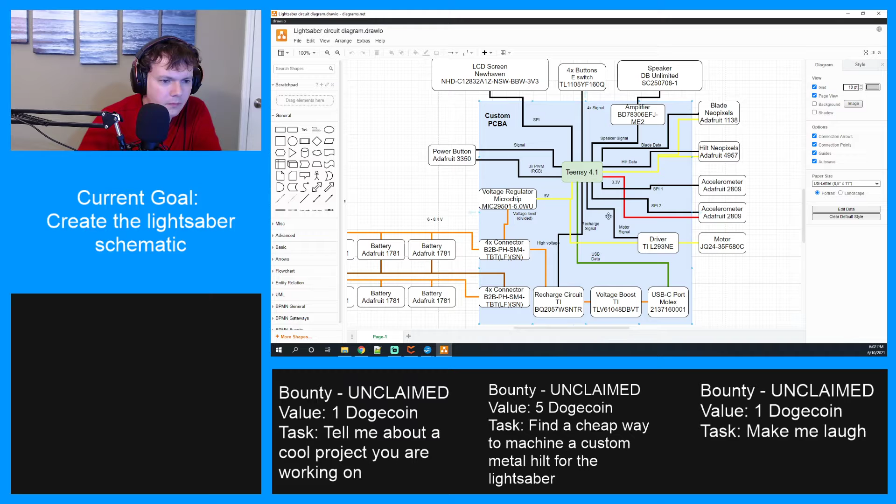This should be good. Let's see, what else? Yeah, so that'll be a good start. So I'm going to try and separate this out and organize it. So I'm going to have different sheets of the schematic, like different pages for the schematic. And the first page will be this power supply.

Then maybe the next page will be like the buttons. And let's see, we would probably want to do user interactive stuff. So buttons, screen, speaker, anything that gives data back or receives data from the user. And then maybe like the Teensy itself is a thing. And then all the NeoPixels is a thing. And then accelerometer and motor is a thing.

We'll see. We'll separate things out too if they start to get really complicated. We'll make multiple pages for it. So I'm just going to follow this.

So far what we've really done to decide this is make this block diagram and pick out components that we want to use for these different blocks. So now we have to go through and actually create each block and all of its intricate little parts.

As a standard rule, we're going to be using for capacitors and resistors and things like that, what's known as 0805 components. It's just a size that will be fairly easy to work with using a standard soldering iron and not have to use an oven or a microscope or anything. And then everything else, yeah, we'll just use it.

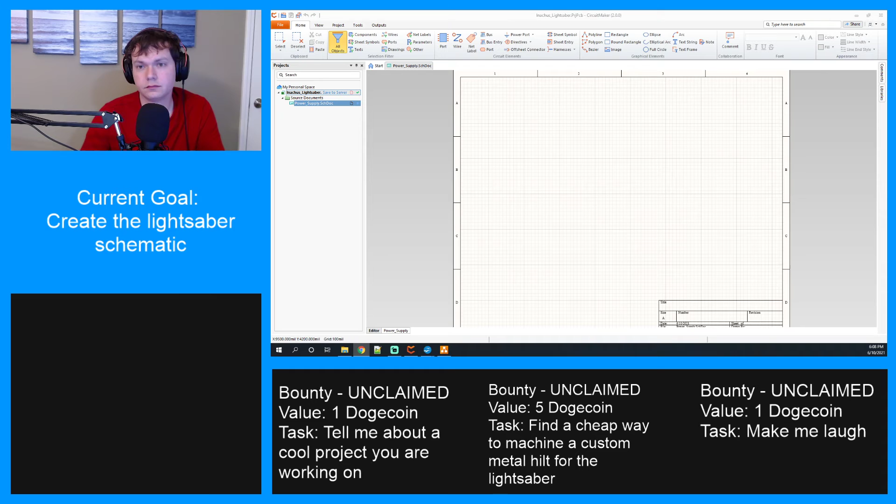All right. Part. All parts. Search. I wonder what the chances are that this has already been made. I'm just going to search, just curious.

It's not looking good, lots of toggle switches. 61048. Ah, nothing. All right, we're going to make a custom part.

All right, well. What is the one we picked out? Oh, 48. What is the DBVT? I need to double check.

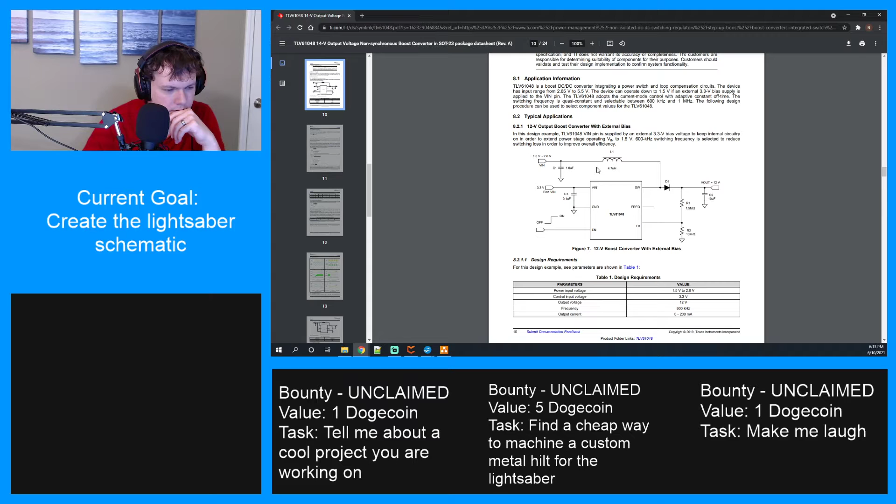What are these two things? With external bias.

Hold on, thought I saw more basic. Right, this one, okay, this is the one we probably want. All right, so double checking that. I was worried that, because I saw the 12 volt and 14 volt thing, that it mattered. Adjustable, we call this.

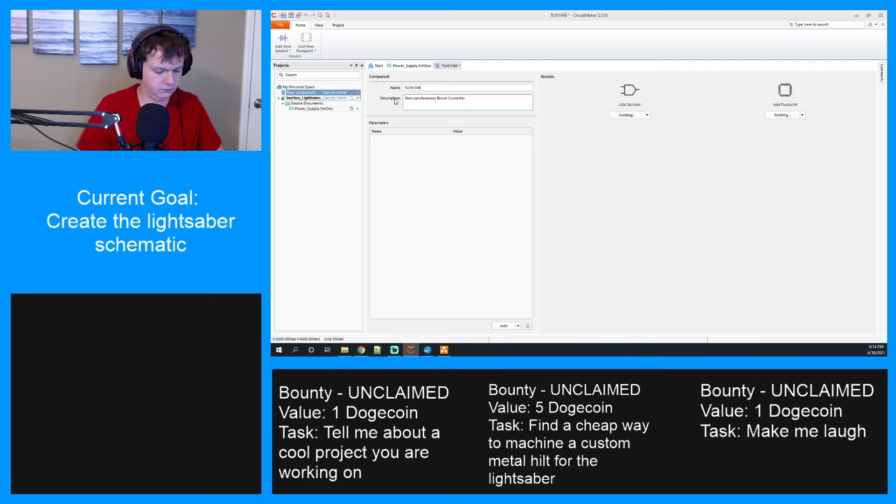How about a non-synchronous boost converter? I'm just using the words that they use here. Okay.

So another thing too, CircuitMaker did a major update between the last project and this one, and it's completely different, right? So this is gonna take some work.

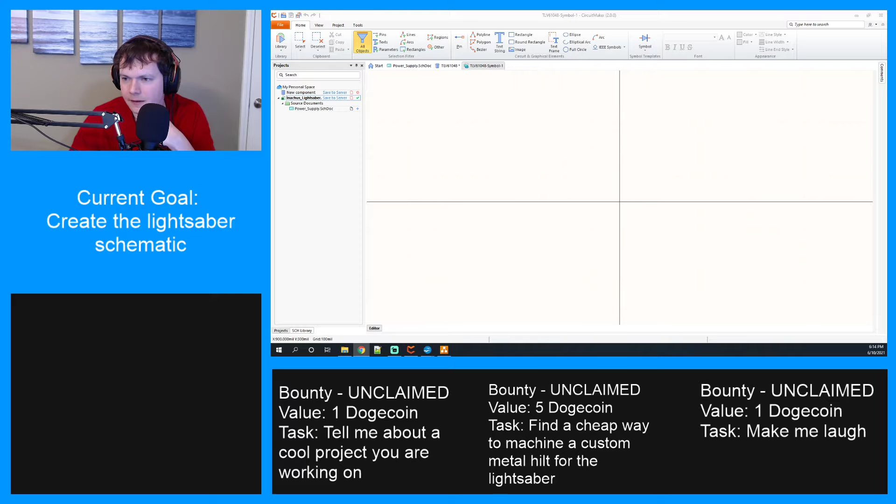All right, new symbol, and we're drawing a symbol. So this is just, we'll use the one given right here. We'll basically make this, but add pin numbers as well. Okay.

So, I guess we start with a rectangle. Okay, clearly I don't understand how this rectangle drawing tool works. Back up, really? Okay, thank you. Here we go.

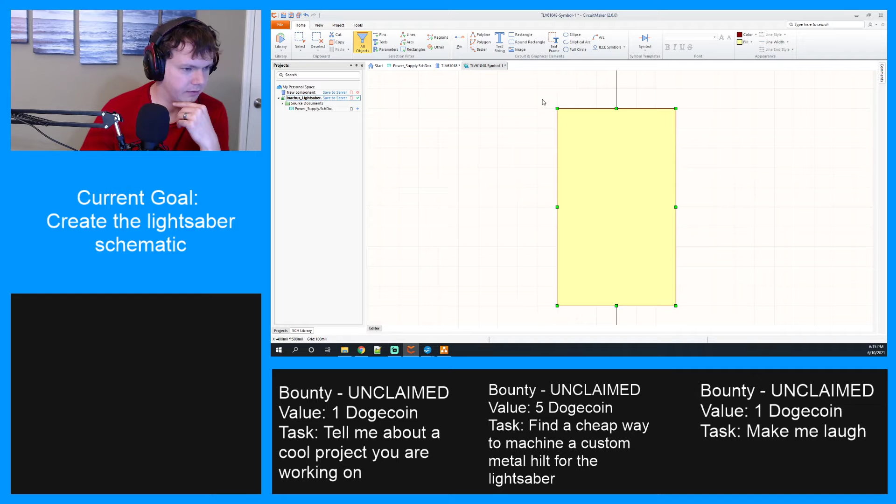And then I'll probably make this a little bigger. I'm not a good judge of how big this is going to be on the schematic too. 200 mil, 300 mil. So up 500 mil, down 500 mil. So on the page, it's about an inch tall. That's probably fine, that'd be sizable.

Does it connect on that side or this side? I think this way? I don't know why it's starting at there. Oops. How do I rotate it? Nope.

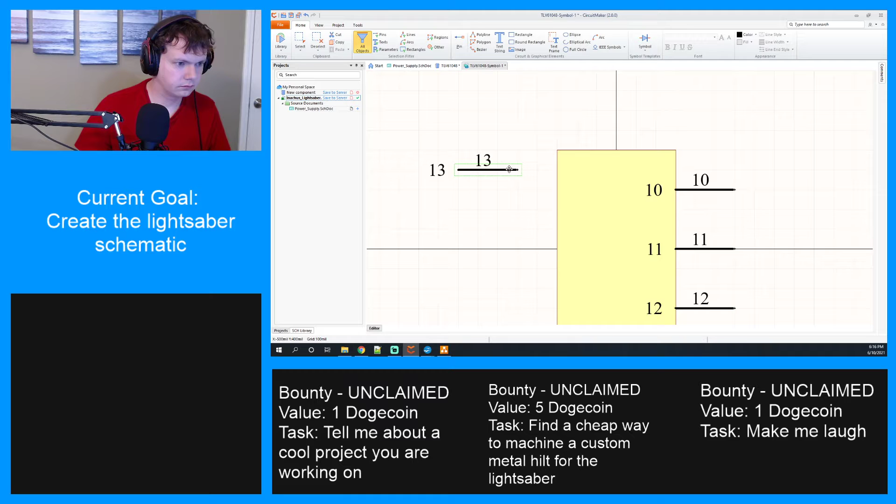Okay. And then, whoops. One and one.

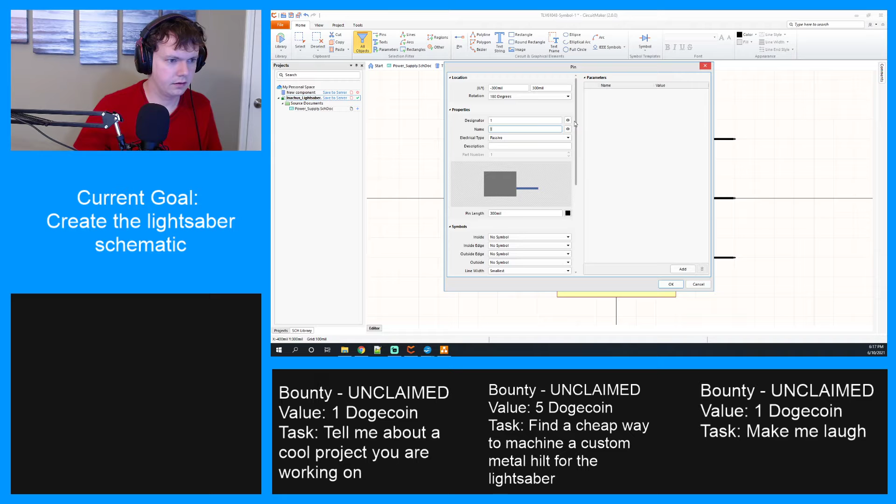Oh, the designator needs to be... Right, which one is this? So the designator is the one there. Okay, the name is the one that needs to change. So that's VIN.

This is ground. And this is enable, active high.

I wonder if that's supposed to have a pull down on it. It doesn't show it here, but we might do that.

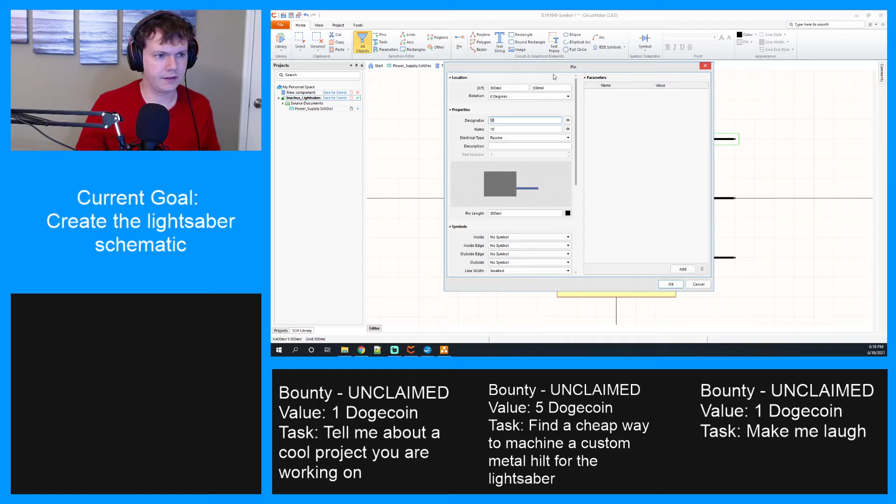All right, which one is this? Oh, pin 6, which I think is SW. Oh, what? The...

All right, the schematic is completely different from the actual package, so we're gonna have to go through and renumber these pins, but we can do that. SW.

I want to have them in the same way that they are in the schematic here, because I think that is probably done very specifically to help make it easier to draw on the schematic. See, okay.

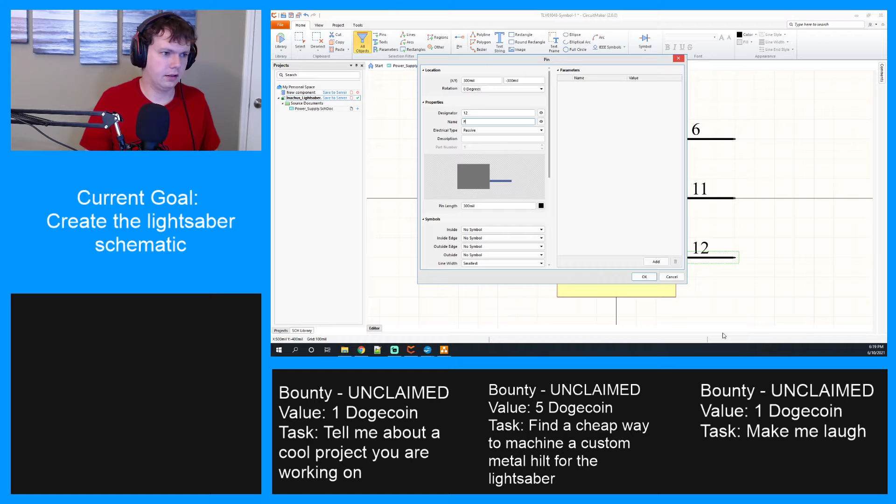And then FB. All right, and then we're gonna have to renumber these. Give me just a sec.

So SW is 1. Ground is 2, so that's right. FB is 3. This is gonna be so confusing.

EN is 4, enable is 4. Five is VIN. And I guess that leaves frequency for 6.

Okay. Do we need like a name or something? I don't know how to do that. We'll save this for now. We might have to come in and change it later.

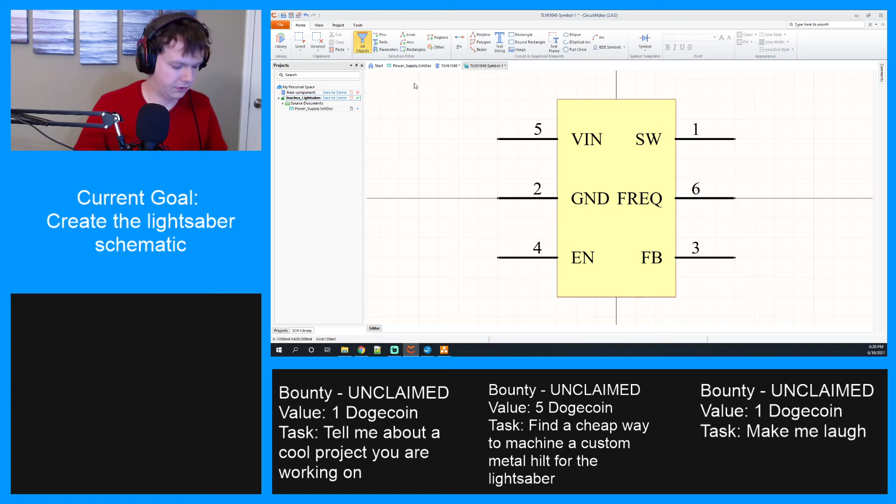All right, and then we need a footprint. This is going to be the trickier of the two.

Ooh, excuse me. Okay.

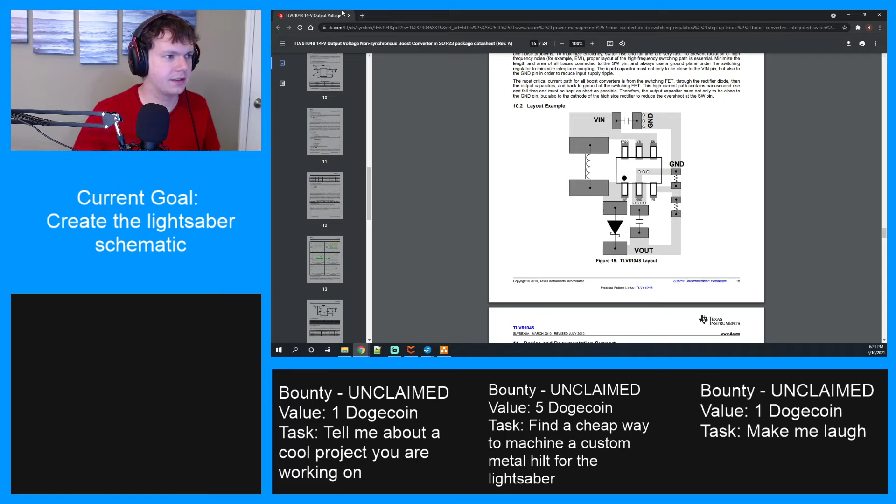We probably just want to do the pads. It gives us a recommended circuit here, but there's really no point in doing any of this extra stuff. We'll do all that later with the extra components. So we'll just start with placing these specific pads for it to mount to. In the datasheet, you can see there's a footprint provided, which tells you exactly how to do the whole layout.

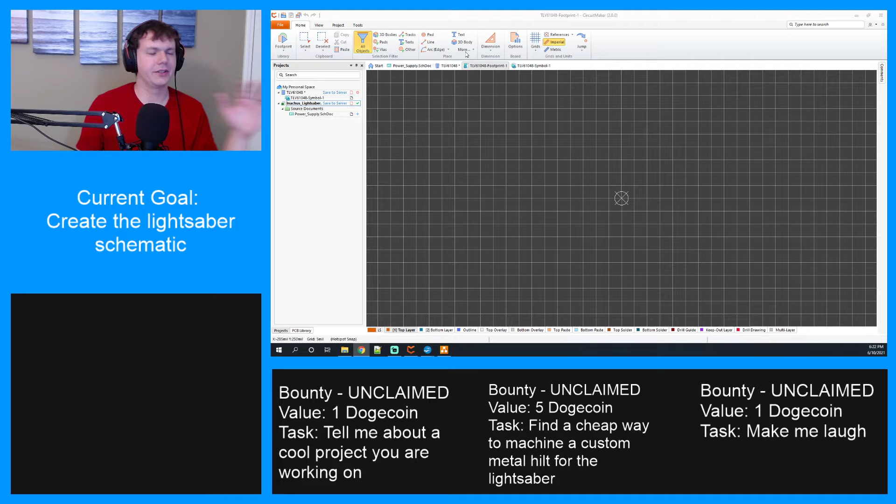Oh, this one, that's what I want. And I really don't want that. Does this have to be a via? Multi-layer. Solder? Interesting.

I just need to see everything that's going on here, and then I'll work it out.

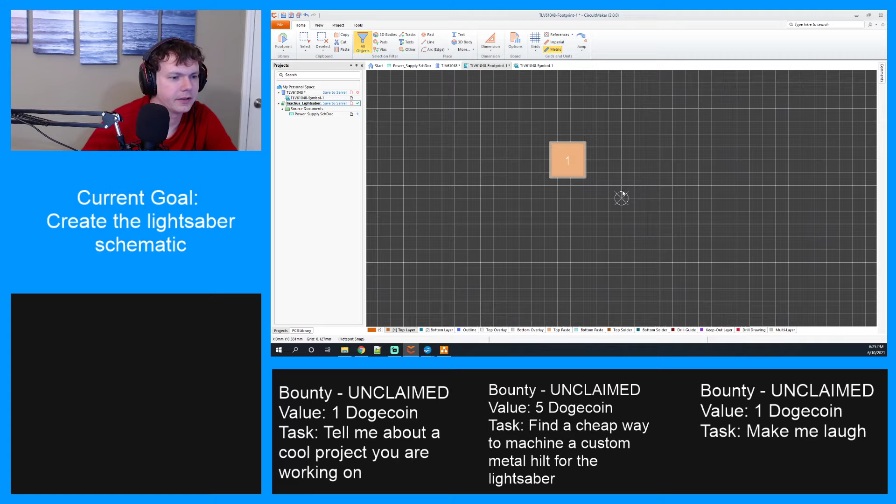All right, let's see if we can change this. Board, inspector, library, shortcuts. Oh, here it is, let's go metric. There we go. Okay.

So it is 1.1 millimeters wide and 0.6 millimeters tall. This is still going to be hard to work with. Okay, and then all this stuff is done as an offset from the center in this datasheet, which is awesome because it actually makes it easy to do. Sort of. So this should be negative 1.3, and then it should go up 0.95. So we're pretty close already.

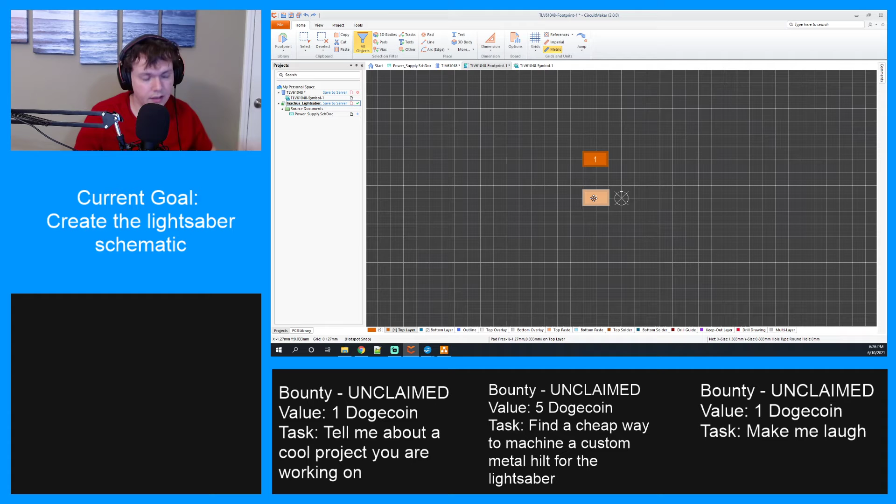Okay, so that's the first one. Then we need multiple. Oh, there it is. Let's make sure we don't have that. All right. Okay, so the Y should be 0, and this should be negative 1.3 again. There it is, okay.

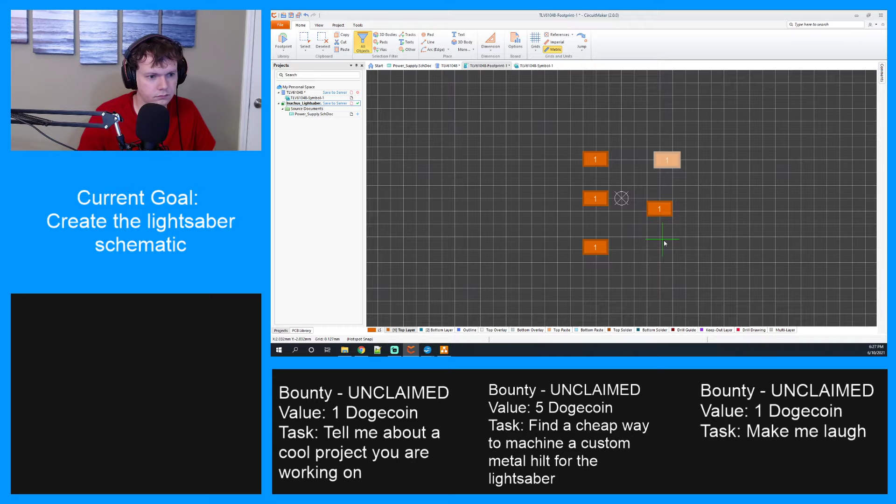Ah, slowly learning this software. It's neat software, it just requires a lot of work. All right.

So negative 1.3 millimeters and then negative 0.95. I just realized that I made this one too high—this should be positive 0.95. There we go. All right. 1.3, 0.95.

Zero. All right, as I get the hang of this again, I'll go faster. 0.3, or negative—positive 1.3 and negative 0.95. All right, so that's everything together there.

Now we need to rename—designator 2, three, 4, 5, 6. Okay.

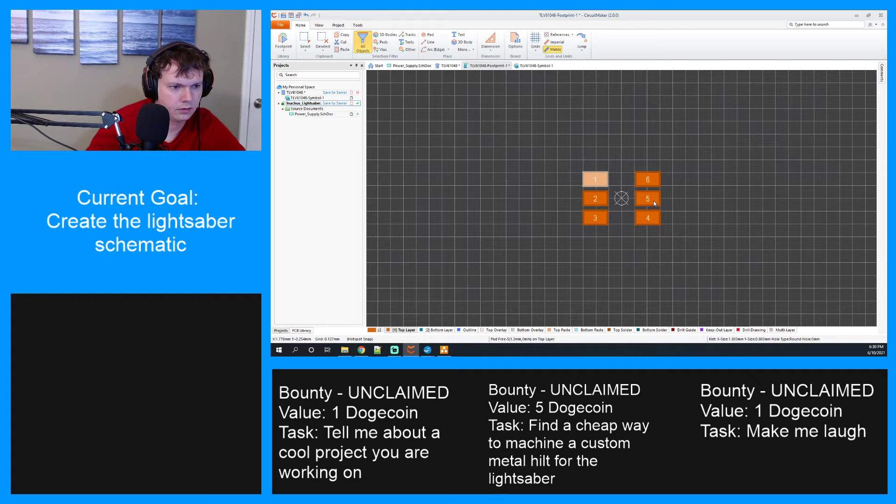Mask opening, exposed metal, yada yada yada. All right, let's see if it has exactly that. Paste mask expansion, solder mask expansion, manual. So it looks like 0.05 is the distance around. Let's see if this works. Okay, oh it does—okay, so I am theoretically doing this correctly.

So that's the distance between the stop, like the top layer where they want it to stop, and then where the metal starts. I don't think it really matters that much, but since they bothered to specify it, I am going to specify it as well.

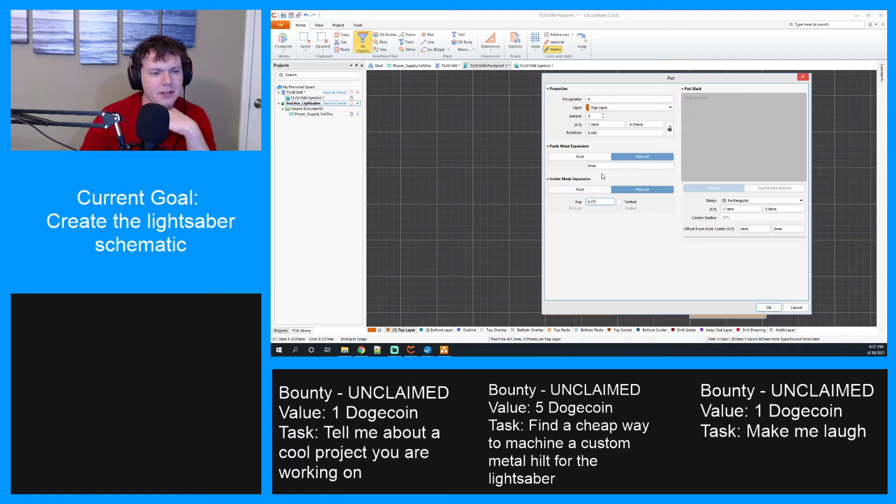Interesting stuff, it's very interesting to me—I'm going to try that again. It's very interesting to me to see what kind of stuff people bother to outline in their datasheets. This is a TI part—TI is huge, Texas Instruments. They make all kinds of chips, based here in the US, and they've been around so long that they have many standards for how their products are set up and what they define. Their datasheets reflect that; there's a lot defined. In a lot of products like this, you'd see the pad size and spacing of pads defined, but they wouldn't necessarily say how much space there should be between where the metal is and the covering stop layer.

The fact that they bother to spec all of this out is incredible. Molex is the same way - another great example. Molex makes connectors, and they define everything. But if you go to a smaller or less known company, there may be a lot of things left out of their drawings, or about their reliability specs. So you can tell how rigid a company is by the effort they put into something, and maybe even their customers, because people that buy TI parts and spend the extra money care about all of these things being defined.

Now let's draw the part, like where it's going to be, so we can have a drawing on the board for keep out purposes. So the part's actual casing is 1.75 millimeters wide at its max, its smallest is 1.45 - they spec out the tolerance because that can vary. And then 3.05 tall.

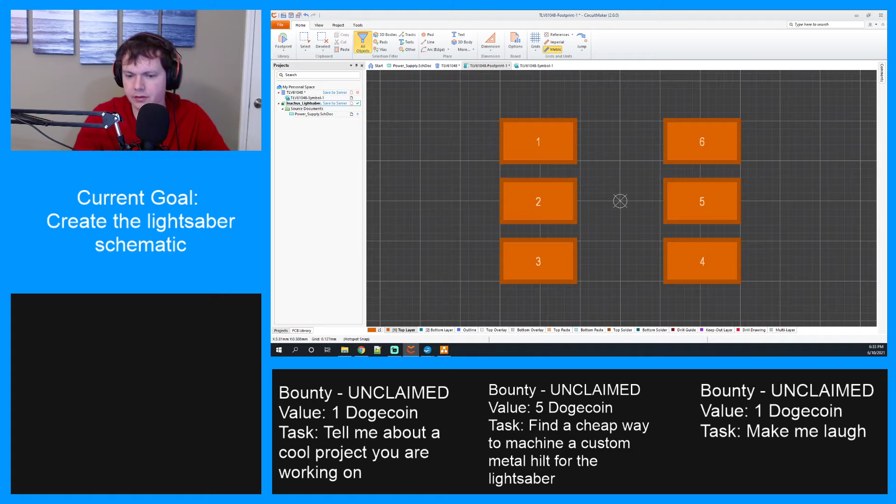So let me get a calculator. Now we get to do all the fun math. Let's just draw a couple lines and then position them accordingly. Ah yes, these are in the copper layer - probably not what you want. We'll just move this to the top overlay. Notice too how there's given top and bottom options here. You can create parts that have definitions on multiple layers, so that's kind of cool.

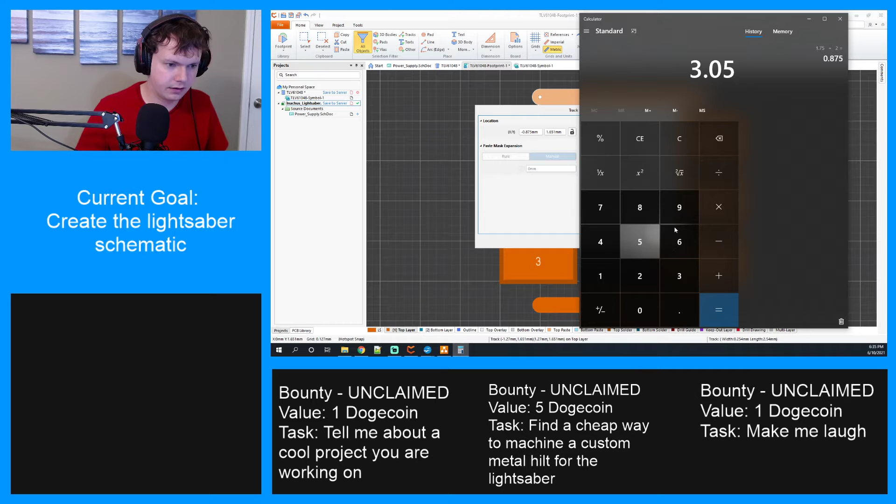So yeah, okay, we want the top overlay. And then our start is going to be - what's 1.75 divided by 2, 0.875. That's negative 0.875 and positive 0.875. And then our maximum height is 3.05, so that's divided by 2, 1.525. Okay, so that's where we want it.

Same thing here. Top overlay. And then this will be the negative 1.525. And then we said 875.

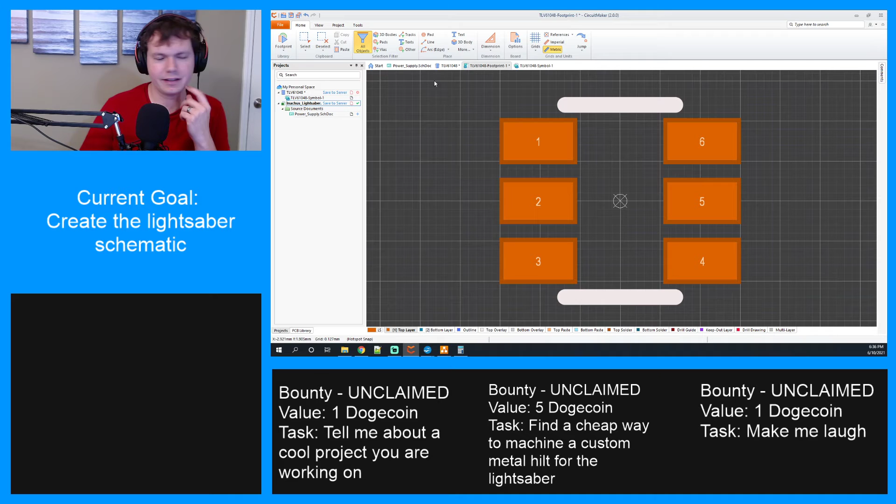Excellent, okay, so that definitely looks much better. Then we'll want like a dot or something here to denote that this is pin 1. Another way we can do this is put a line on this side - actually that's what I'm going to do. I kind of like that better because it'll be hidden underneath the chip.

So we'll put a line here to here. Oops. All right. And we will say that this is the top overlay, and then where it's at might be okay. Actually, we'll adjust the height a little bit. Yep, dead even, all right. I didn't even bother to look at the thickness to see if that was anything I cared about.

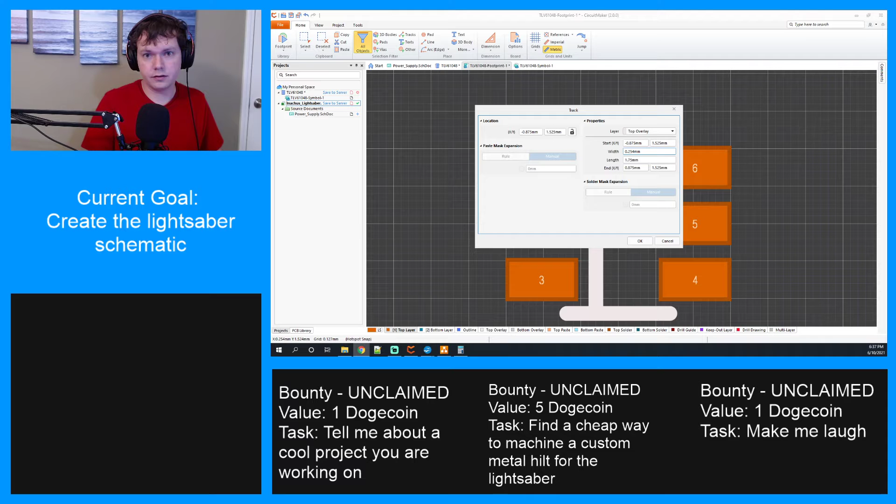All right, what are the other options here? Fill, solid, via, keep out. Interesting, text, big text. I don't know why it defaults all this stuff to the... oh, because I'm selected that layer, so...

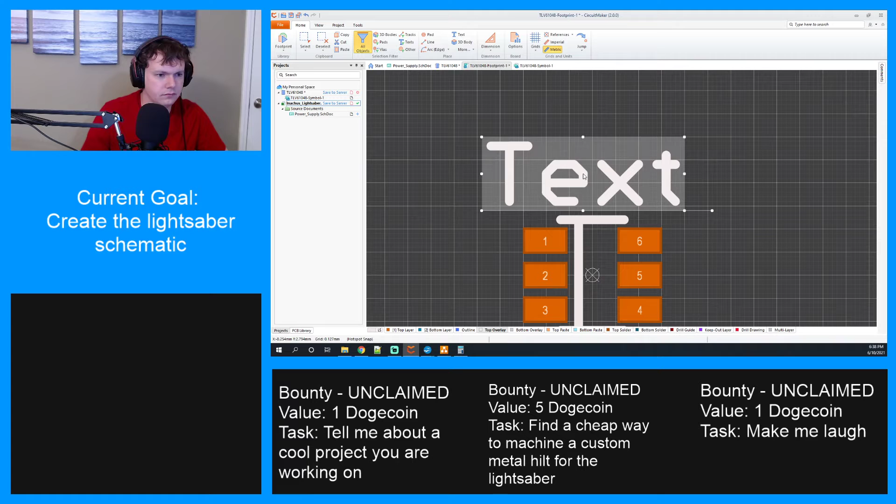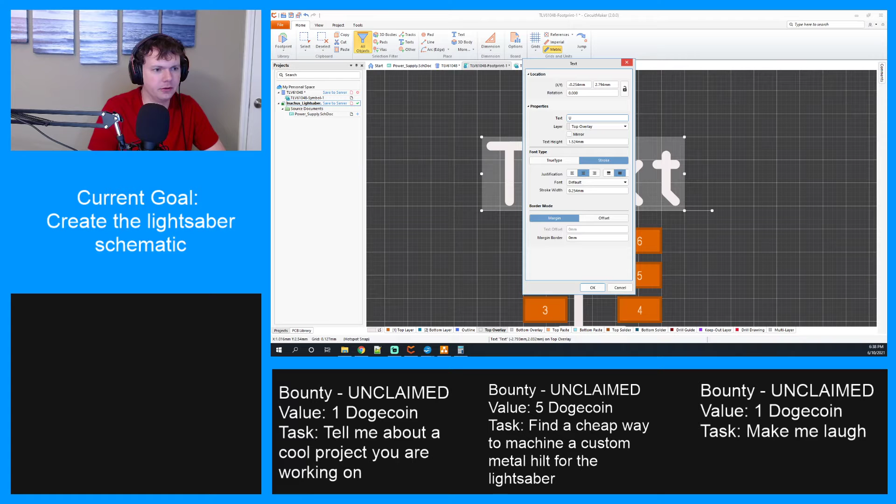I don't know how to say that text is like the name or something. The text should be something like U question mark, I guess. It probably needs to be way smaller too.

Text height... no, it don't have to be sizable, probably like 2 millimeters. I know that looks huge, but that actually is correct. Also, I don't know if voltage regulators are U's.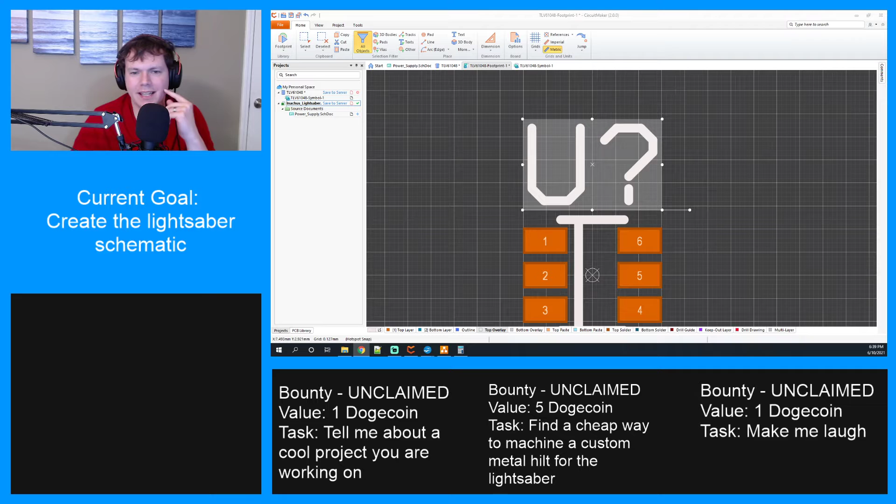Hold on, let's go look at the Wikipedia article. Okay, so these are called designators, reference designators. Basically, everything on a PCB should be a letter followed by the number of which version it is. And here is the Wikipedia article on exactly what you should use. So U means integrated circuit, or IC, or chip basically, right? If you're doing vacuum tubes for some reason, V. But then there's some that are pretty obvious, like resistors - resistors are R. Others are not so obvious. What's a good example of that? Oh, oscillator, yeah - crystal or oscillator is Y or Xtal.

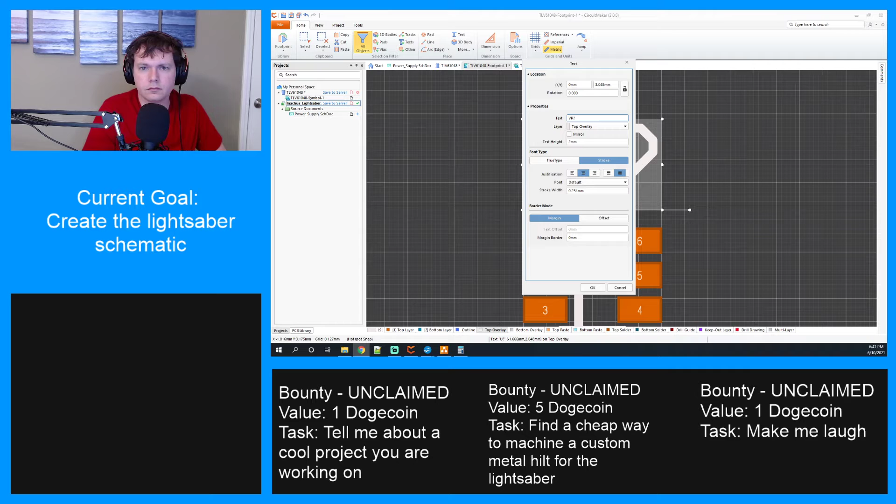So, you know, either voltage regulator, but this is a boost converter. I don't think there's a thing for boost, but a voltage regulator might be pretty close, so we may want to say VR. And then I'm going to look up something real quick. Okay.

Oh, interesting. Okay, so you do put a question mark, and then when you run a certain process, it auto numbers it. Okay, so we want a question mark, definitely.

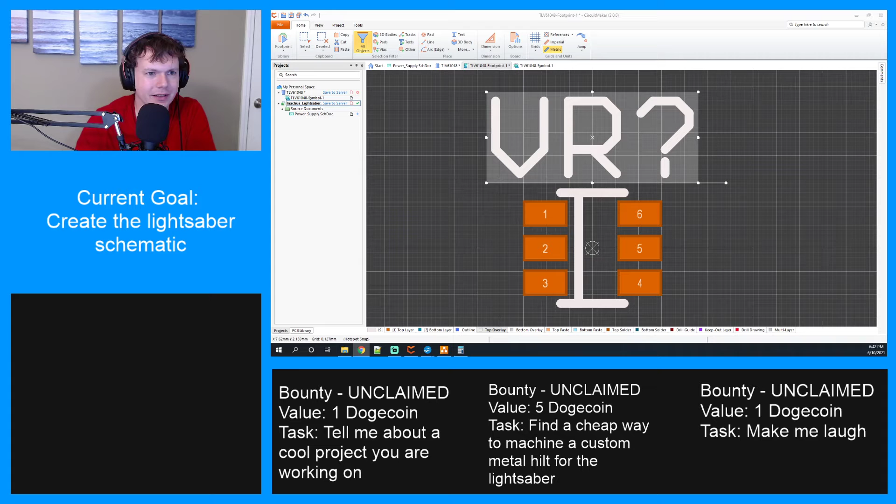I love this giant text for this tiny little part. I picked out this part because I thought I might be able to solder it by hand, and now that I'm looking at it, I'm not feeling so good about that, so we'll see. I might have to get a little creative, or buy something to help me with that. Okay, so this is our pad, and I think this is good.

I don't think we want anything else here. So let's save this, and then go here, save this. We probably want to actually change this.

We need to add the 3D model. So here, if we look at the 3D body - oh, that's to add one. Hold on. Nope, there it is, thank you. We can see the 3D model is not great. Also, it's really hard to see in this.

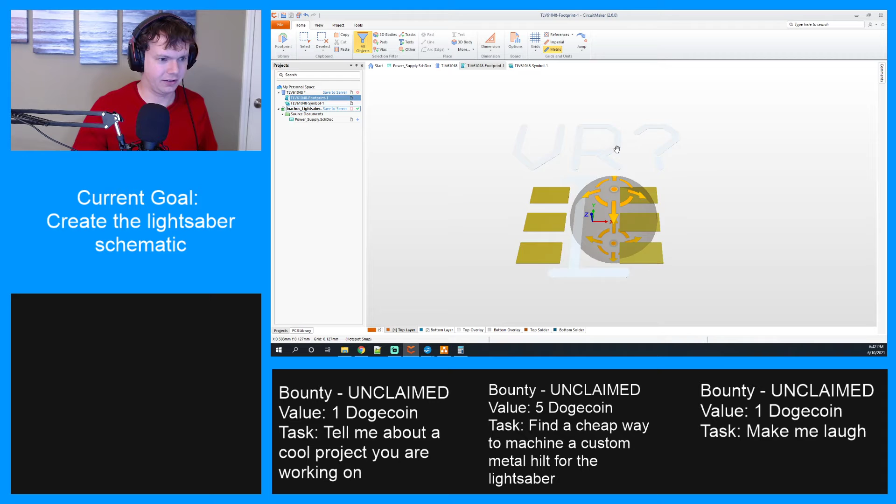Jeez, can I change the background? There should be a way to set colors.

Schematic, PCB editor, display, change the colors of the layers. Oh wow, you can have tons of layers. That's awesome. And CircuitMaker allows up to 32 layers, it looks like. That's really awesome, actually.

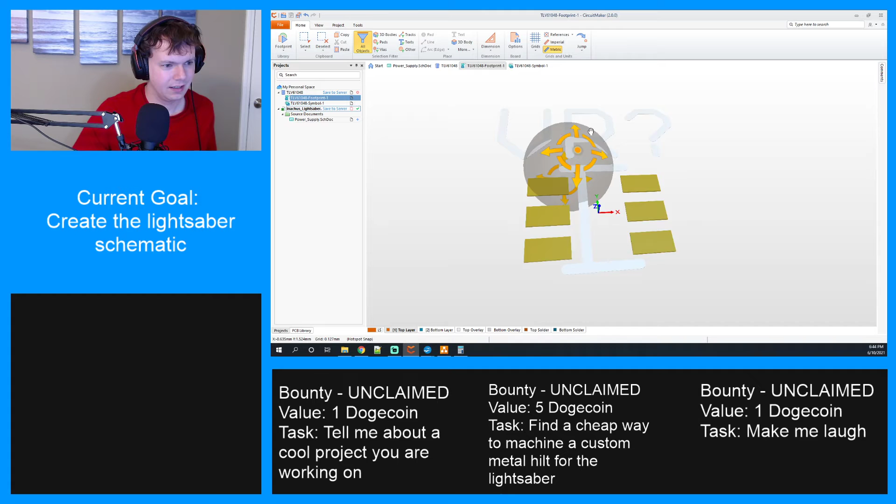Well, that would be fun to work with. Okay, I don't know if this is going to get us anywhere. We'll just close it and accept the fact that we're not going to be able to see this very well. So I need to make the part stick up somehow, so that we know where it is. So 3D body, let's go back to this.

Right, okay, that wasn't what I wanted to do at all. All right, let's try this. Okay. All right, extruded, yada yada yada, center. How do I say how big it is? Two.

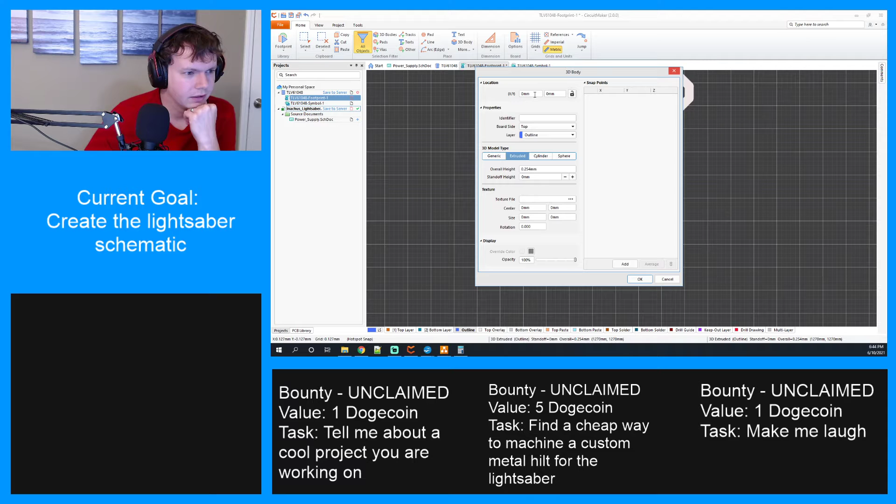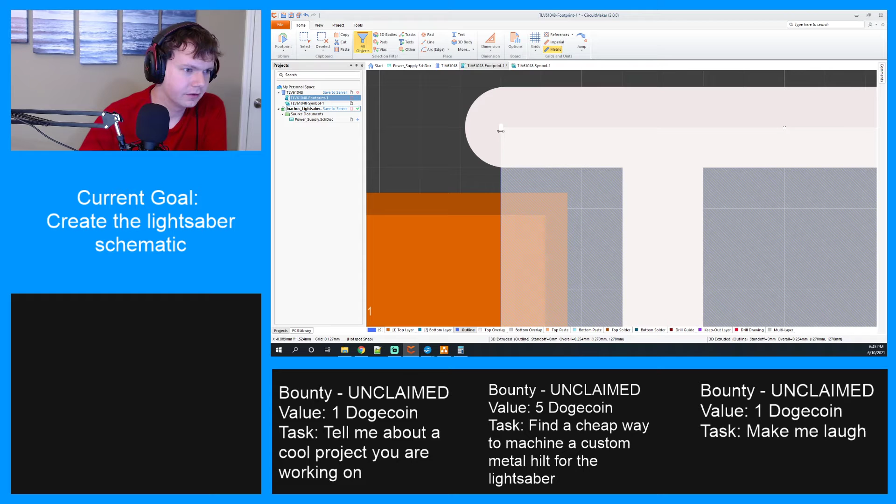I remember this being really hard with the last one too. All right, well, we'll say that it's probably correct, right? Because it goes to the middle of each of those, yeah. I need to learn how to do this better. All right, overall height 0.254, standoff height.

Extruded, cylinder, sphere - we just want to extrude a little bit. How tall is it off the board? 1.45 millimeters, so that's what we'll do. Okay, I think that worked. If I go to 3D view - hey, there it is. Look at that giant thing.

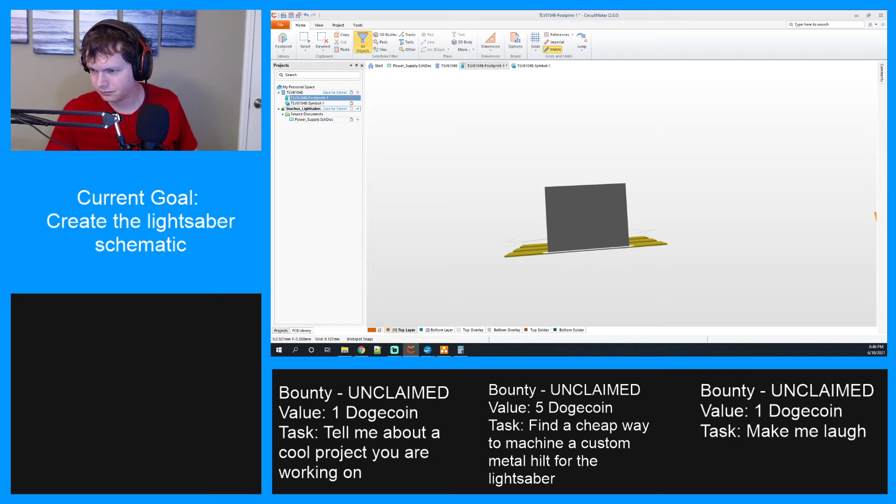Interesting, okay yeah, so that's definitely the highest off the board. And then I probably could go through and put like the pins or something, but I don't think that's really necessary here. Just having this will be enough for us to denote where it is. Okay, so that looks good, and then go out here - I know it's hard to see those letterings, the letters, but it all looks good.

So save that, and then if we go here, all right, it shows up - the part exists. And it looks like it already has - oh okay, by default, does it do the name and symbol? Because if it does, that's good.

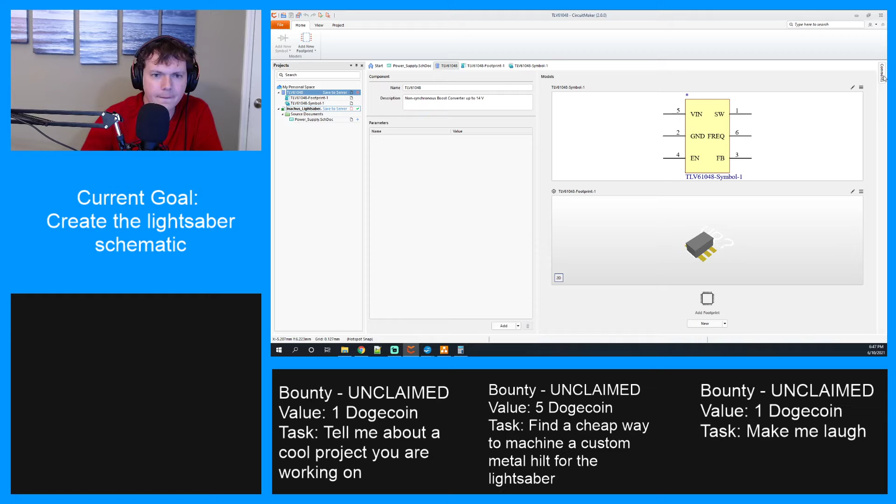I wonder if there's a way I can link those. All right, so now that this is made, how do I commit? So if I go here now to this and add a part, can I find this?

TLV... I just realized when I was searching for it, I didn't search TLV, so I might have just made something that already exists. 61048.

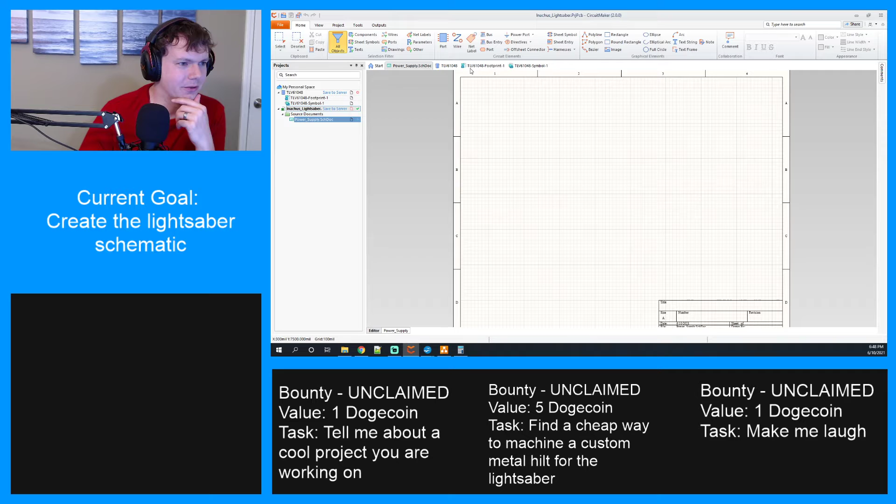Oh, it does exist. I spent all that time making it - it already... All right, well. I'm doing great. Hopefully it's a good thing I'm not recording this, right? Documenting my failures forever. All right, hopefully nobody makes fun of me too much for that one.

So I guess now I forgot which one we're using, the T - all right, so we're using this one. So now after all that, I can just go ahead and place this part.

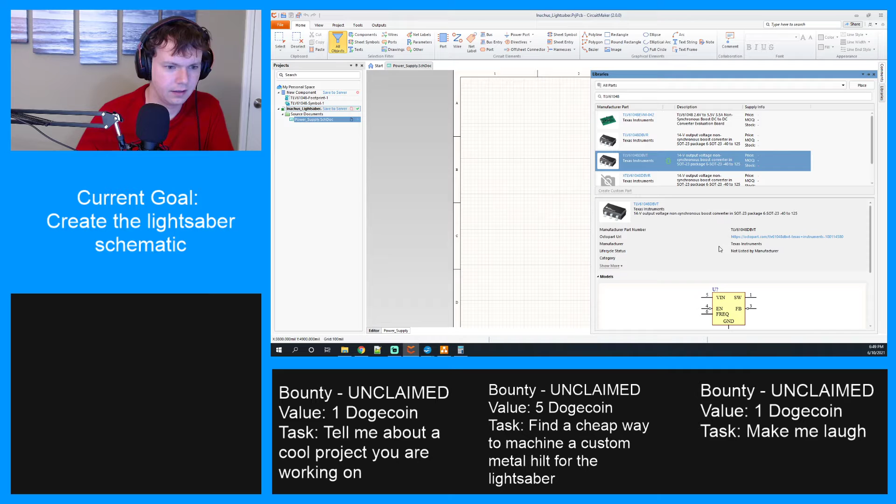Part URL. Wow, they did the model the exact same way I did. All right, every time I click on this, it opens up the page over here. Can I place it? There we go, thank you.

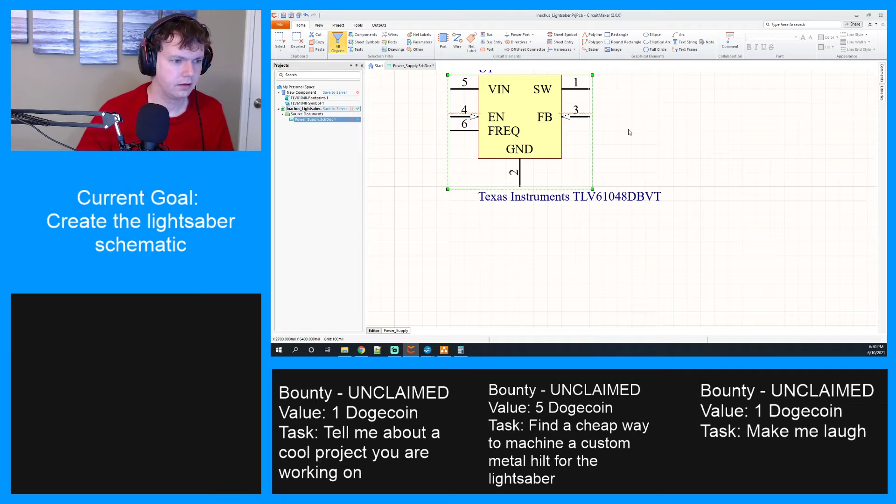All right, so how are we laying this out? I guess up here, power coming in. All right. U1 — so they went for the U designation.

I don't know what that error is, other than it may be just a disconnect error or something. All right, well, knowing that's a thing, it might make this a little easier then. We still have to go through and find components for it all. Yeah, let's start with that.

Move this down a bit. Okay. All right, so let's see, let's do a wire. And then I hate where this text is on this thing. Can I move this? Yeah, that's awesome. Okay.

Net label, and then this is going to be USB — we'll just say 5V. Okay, I like the underscore.

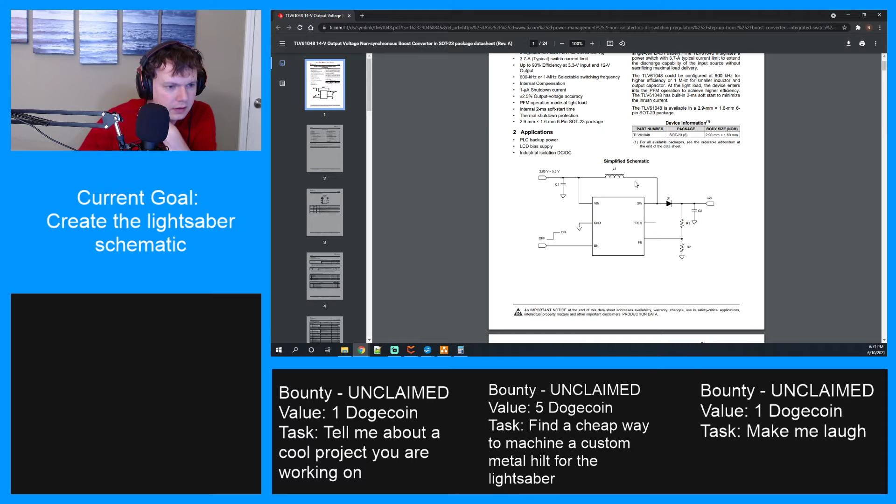Okay, well, let's find this part again. All right, so here's what I'm going to be looking at. We got to add all these components: this capacitor, this inductor, these two resistors, this capacitor, and this diode.

It should have either recommended values or a way to calculate them for most things. So here it gives an example of values. This is with the bias — I don't really care about that much, I'd just rather do the simplified. Just wish it would give us values for this simplified version. Oh well.

So we'll have to choose capacitors as well, and other things. And then I'll have to figure out if it wants a specific type of capacitor. Oh, they recommend some. I bet both of these are tiny, though.

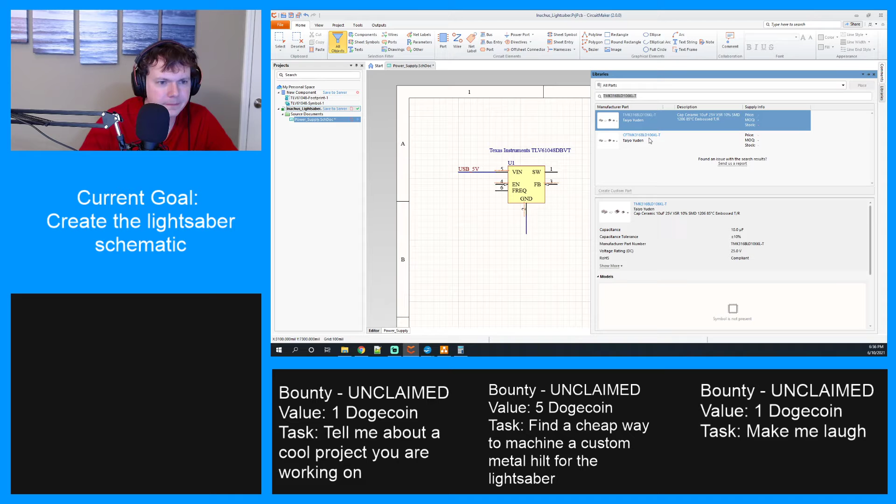Let me see here, I got DigiKey pulled up here. Let me just search for something like this that's not incredibly expensive. And then, because these are like $1 each, and that'll get — if we keep buying parts like that, it's going to get to be a lot. But we'll get something very similar.

Let's see, let me pull this up. All right, let's just go ceramic capacitors. Okay, what was this? They suggested a 1206 package, which I think is fine actually, because that's pretty big. So—

In stock — let's go active, make sure that they're currently being sold. Capacitance, we want 10 microfarads. It may not matter how much money we want to spend — this might be a pretty expensive thing no matter what. Yeah, these are fairly pricey, no matter what kind you get.

All right, X5R temperature coefficient. And do we have a tolerance plus or minus 10%? All right, we're zooming in. We want cut tape, so I don't have to buy a bunch — just want to buy a couple.

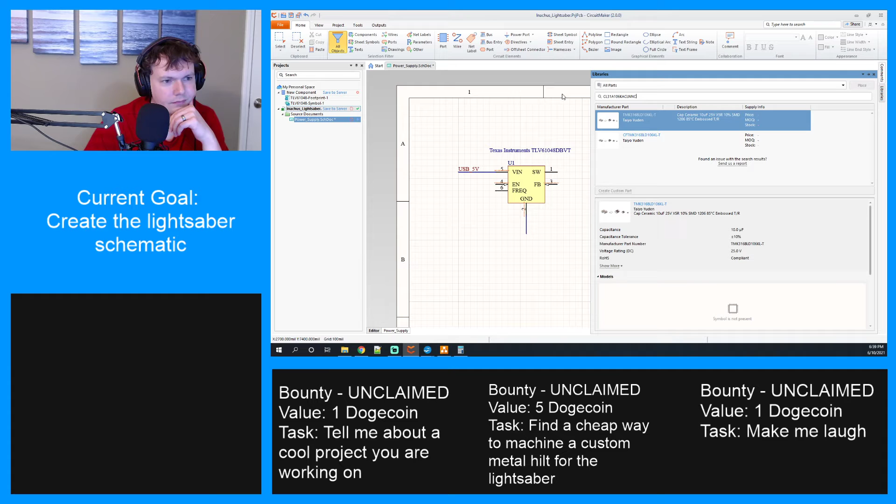All right, let's see if we can find this in here then. If not, we'll be using something or making something. Yep, and it does, and it has a model. Great. I like that.

And I'm going to have to start getting rid of these part names for non-ICs and things like that, or this is going to get really complicated. Okay.

Let me pull up this — this is the PCBA bill of materials. And I'm basically just going to start labeling things out as we get them. All right, let me reorganize this a bit.

I'm going to want this top line. Let's see, location, description, manufacturing part number. So, 1.

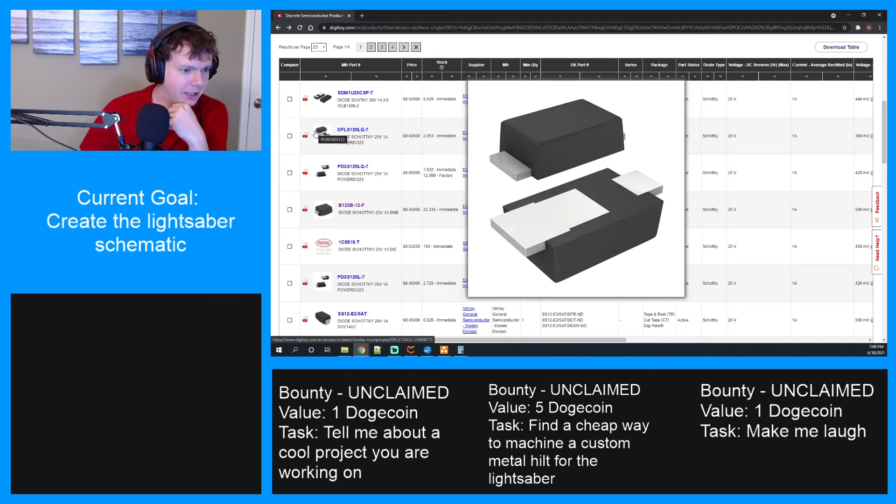I'm picking them based on how easy I think they'll be to solder. Obviously, these ones that are underneath, not so easy, but with the tabs sticking out, they are actually. Yeah, 500 millivolts, 200 microamps. Okay, I think this could work.

Let's see if these guys are stuff in Circuit Maker. I don't know what determines, like for Circuit Maker, what parts they include, which ones have models, that kind of stuff. If it's just until somebody takes the time to do it, maybe.

$0.09. That's really cheap, actually. Don't know how I feel about that one.

On Semiconductor, kind of like their stuff. Let's try it. That's actually closer to the original spec too, as far as the capacitance and everything. So, all right.

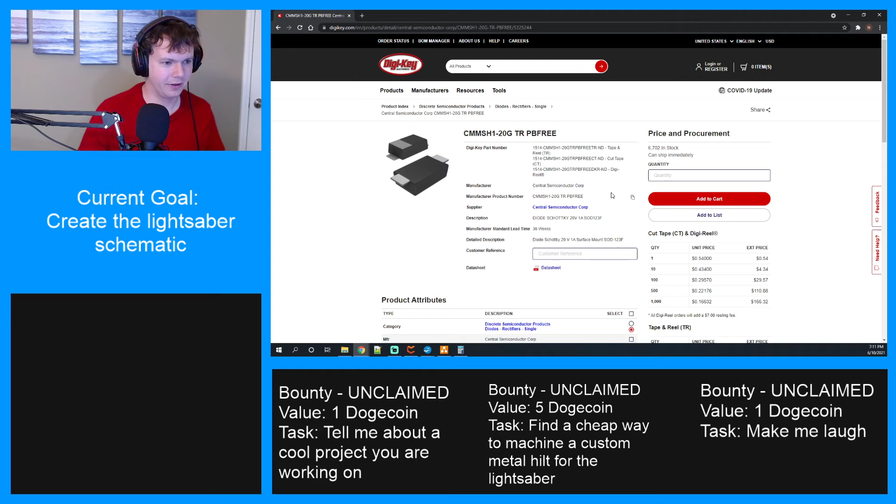Now I'm just getting curious, like to what level stuff exists in Circuit Maker. I wonder if they're just using a database from one of these suppliers and just include—yeah, they do, they have it. Okay, include everything, but not necessarily have a model of everything.

All right, I'm gonna start going through this, seeing what exists. Need the manufacturer part number, please.

Ooh, there's a model. What does this look like? So there's 1 amp leakage current, 1 milliamp. Ooh, that's kind of high. But the voltage drop is low. All right, I'll try it. Why not?

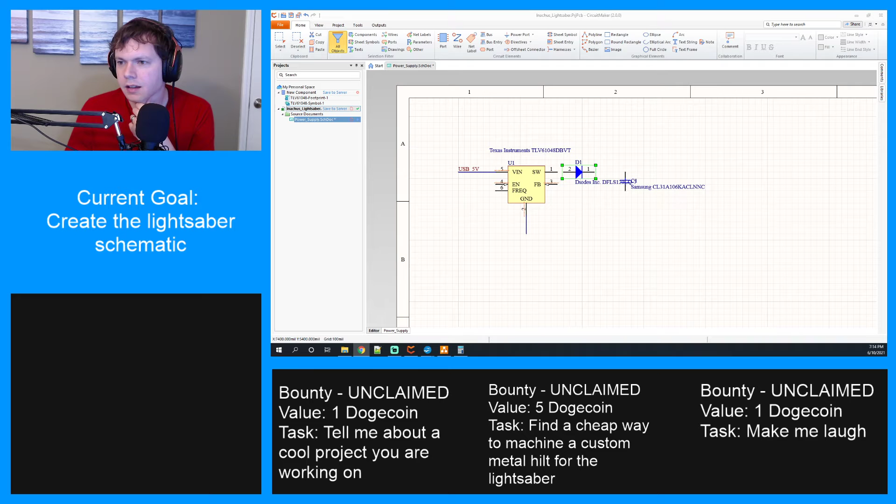D1 goes directly out, nothing between that. Part. There we go. And then I'm going to delete this. I don't think this is necessary. How do I hide this? Hide that. Awesome, thank you. This too, I don't want the comment. Okay. Can I show a value? I feel like that would be useful. Is that not an option? Because that's really annoying otherwise. Interesting, okay. Nope, don't want that one. Ground.

All right, let's go ahead and start connecting things up.

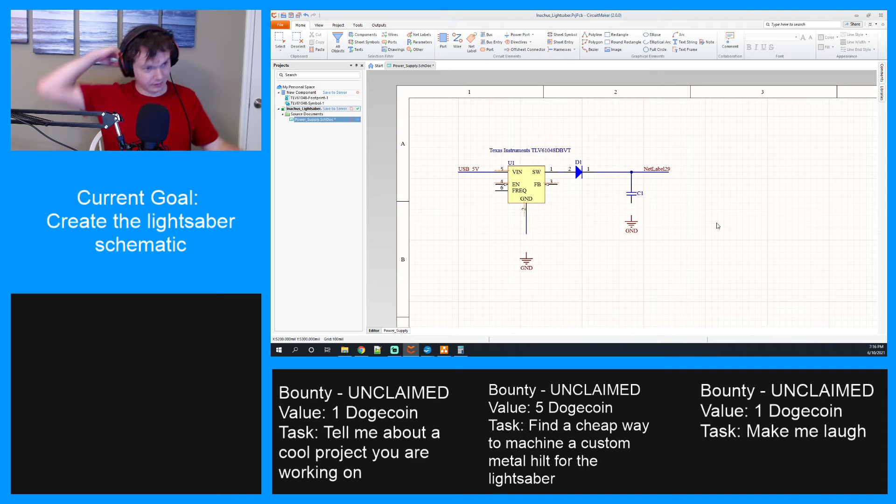Come on. I think it froze. Yep, if it crashed, that's going to be awesome. Just a bit of lag. Yeah, something definitely crashed, because none of my windows are opening now. Oh, some of them are. Okay. Oh, all objects, I forgot. This is... okay, I forgot about that with Altium. It's just weird that way. You can basically turn it off so that it hides any windows you pull up or whatever, which is an odd design choice, personally.

8V4, so 8.4 volts. Okay. Let's connect these to ground. All right.

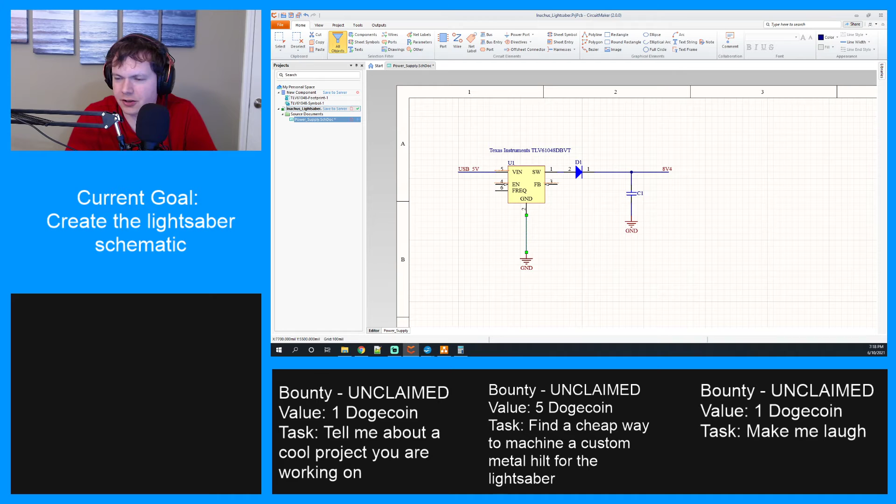So it looks like in the simplified one, the frequency line is disconnected. Actually, it is in a lot of cases here. Why is that? Odd, okay. Oh, I'm not sure what that's used for then. Let's look at the pin out here real quick. Frequency select pin: the device operates at 600 kilohertz if it's left floating or pulled high, and at 1 megahertz if connected to ground. Interesting. We'll leave it floating then, because I guess that's the default.

All right, next step of this, the voltage divider. And math. I'm sure it gives us an equation here somewhere, but I'm sure it's a very basic voltage divider equation. All right, V out divided by V reference minus 1, times R2, gives you R1. So select one, and then you get the other. Okay.

So pull up the calculator here. For our V out, we want 8.4. We divide that by the V reference, which I believe is 800 millivolts. So 0.8, equals 10.5, minus 1 equals 9.5. That should be the ratio, so R1 equals 9.5 times R2. R2 being the lower resistor, the one connected to ground, R1 being the one between SW and FB.

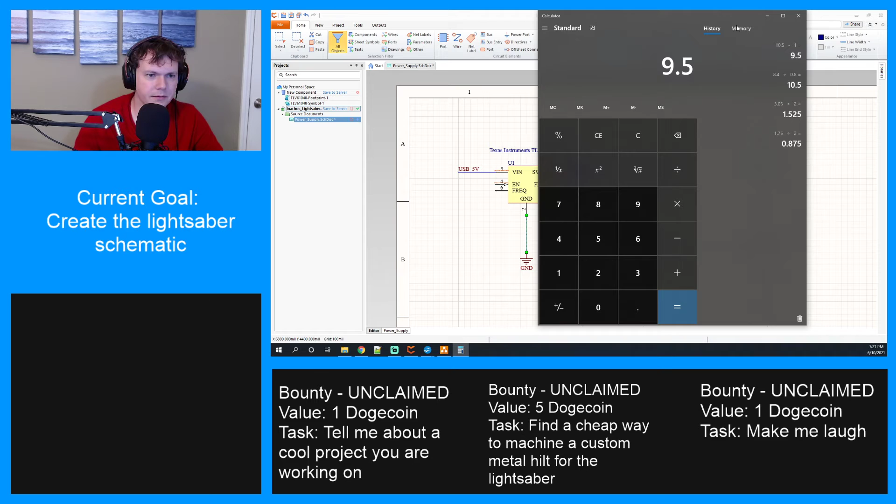So in the example they give here, R1 is... wait, do they have this backwards? I think they do. I think their equation doesn't match their schematic. Oh no, wait, yes it does. Okay, yeah, sorry, I'm having a moment. So it's 1.5 mega ohms for R1. Maybe we assume that 1.5 mega ohms divided by that, and we should get our other resistors. So 1.5, well here, let's do 9.5 and store that, because we're going to need that for later. And then, let's see, 1.5 divided by this gives us 0.157, so 157 kilo ohms.

Is that an easily available part? Surface mount chip resistors, 825,000 different products to pick from. That should be easy enough. All right, values, let's just start with that. Wow, there's some oddly specific values here. What do we say, 157 kilo ohms? What's the closest we can get? Probably like 150, right? Yeah, 150, 152, 154, 156. If we got a smaller one, it would actually make the voltage slightly higher, which would probably be a good thing, considering the voltage drop on the diode. So maybe a 156 would be ideal. How many parts? 1. Okay, that's not a common value. Looks like 154 is a common value. So we'll do that. Okay.

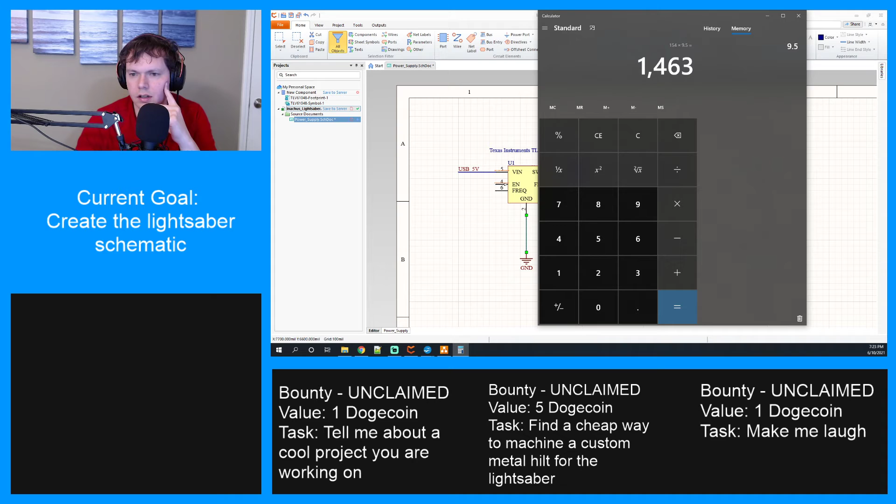We can get 1.47, and that's semi-common as well. Or 1.5. We really just want to make this easy.

So let's do 1.5 mega ohms and 154 kilo ohms. And what voltage output does that give us? According to the math, 1,463 divided by 154 equals 9.5, plus 1, times 0.8 equals 8.4 volts.

Okay, perfect, those are great values then. So 154 and 1.5 mega ohms, I think is what we did there. Oh no, we did the 1463. No, we need to do 1.5. Sorry, 1,500 divided by 154 equals 9.75, plus 1, times 0.8, 8.59 volts. With the voltage drop, that's actually pretty reasonable. All right, so that's what we're doing: 1.5 mega ohms and 154 kilo ohms.

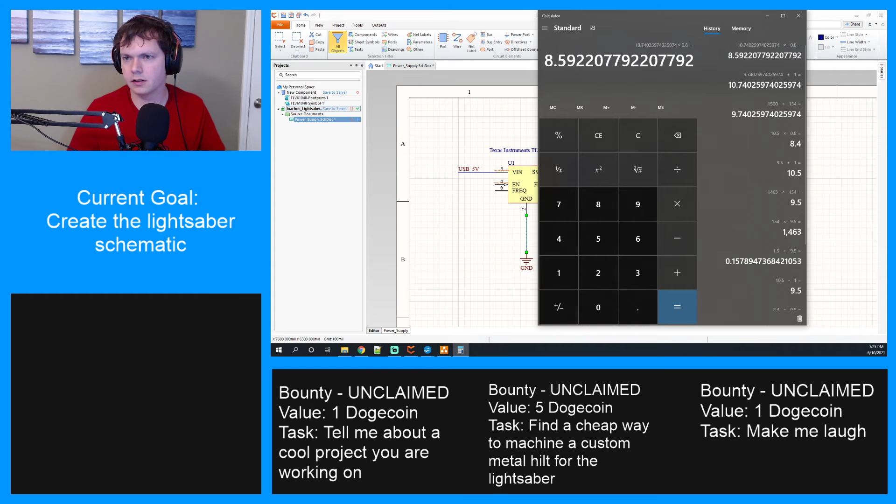So let's find a resistor. Well, there's a lot of options. Let's pick a package size. How about 0805? Oh wow, and it already has a model. Look at that, all right, we're using this one.

All right, let's go ahead and place this. I'll drop this here. And then, there's plenty of these in stock. I think, yep, 40,000 in stock. All right, and then which one is this? This is R1, value 154K.

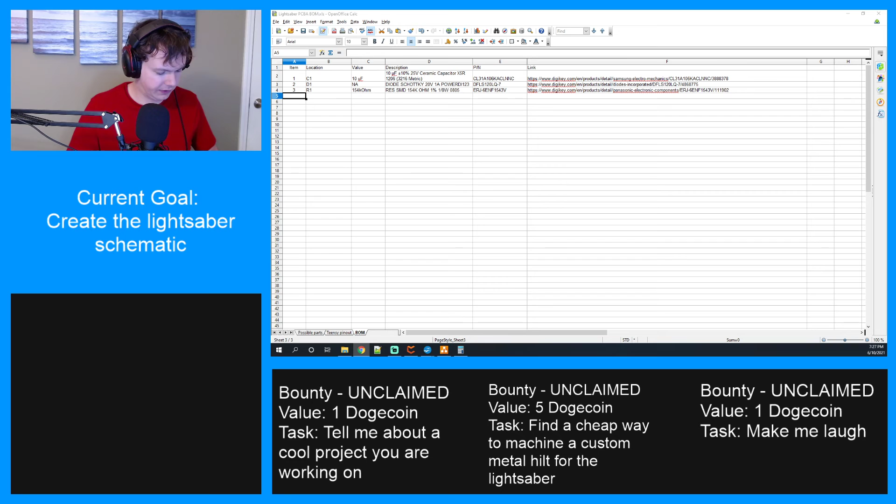How about this one? I found it, this is the same company, Panasonic, so maybe it'll have a part as well. And it does, fantastic. Perfect, and there's 27,000 in stock, so there'll probably be more later. And this should be R2, right? Yep.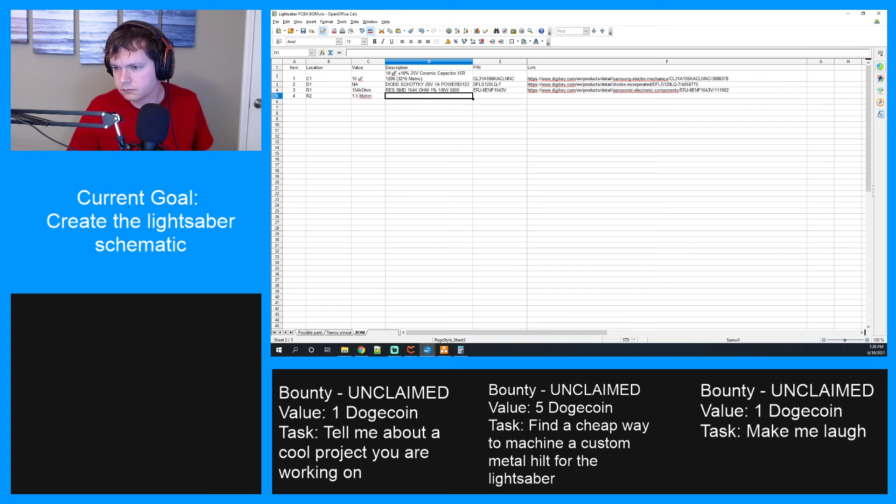Okay, and then description, part number, and let's get a link. All right, that looks good. Properties, resistance. Oh, can we show this? Oh, it does show it. Nice, wish that format could be better.

Mega ohms. Nice, I didn't realize, okay, that's how you do that. Hide the description, good to know. So can I do that here? It doesn't have a thing for it. What happens if I check all these? Oh wow, it just throws all that on there. It says show more, so maybe it does have it.

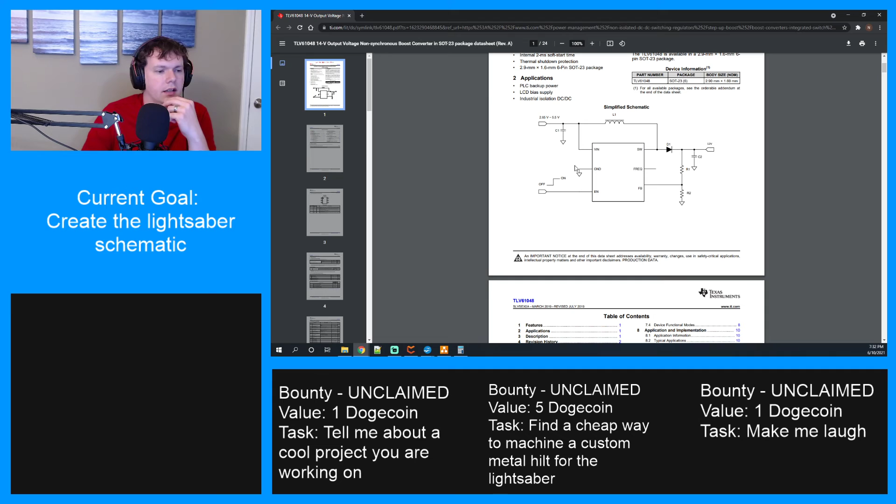All right, frequency we leave floating. Enable, where does that go? So pulling our schematic back up. Oh, we still need to do this one, VIN. All right, so enable: off is low, on is high. So we probably want to tie that high.

Might have to use a divider for that, unless the chip can tolerate up to 5 volts coming in. So let me see here. We need to find out what the enable tolerance or values are, minimum values. Voltage enable, logic high 1.2 volts, logic low 0.4 volts.

Is there a max? Begin... maybe not. Weird that it only found... okay. I'm assuming it can tolerate up to 5.5 volts on that enable pin. So we could probably just tie it to that, and put it on a pull down maybe, do like a 1 mega ohm resistor.

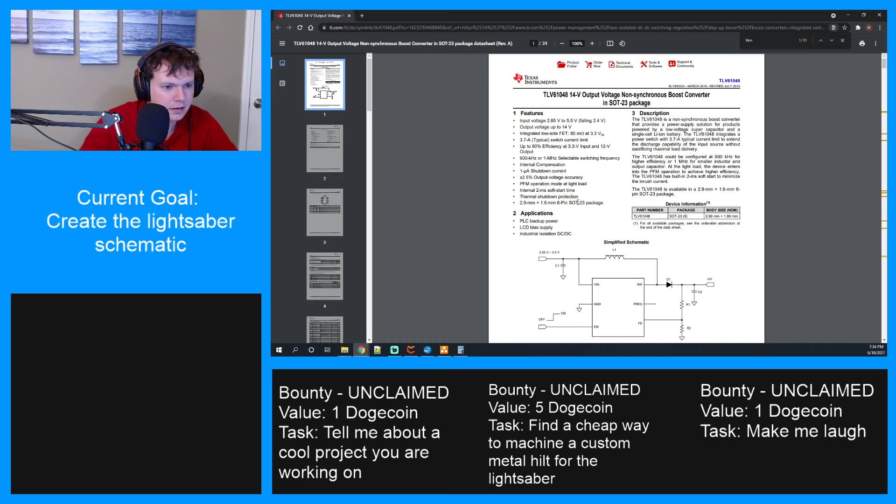Because I don't see anything else. Enable pull down resistor, oh this must be internal, I think. So we might not have to, because it might have its own pull down resistor inside. That would be ideal, okay. Yeah, so you just connect it straight to that. All right, that gets connected to power. All of that to figure that out.

There we go, all right, and then we have one other thing that has to get done. See, I'm going to move this down over here. Okay, we need a bypass cap. It probably hasn't... I don't know if they would define what this one should be, this is probably just a generic. I just need to know the value.

I think they expect 1 microfarad. All right, 1 microfarad's easy, let's do that. Double check if there's any recommended stuff. Yeah, they say 1 microfarad.

Input and output capacitor selection. They recommend output capacitors, but for the input, I don't think it matters that much as long as we get something that can handle the voltage and everything. Okay.

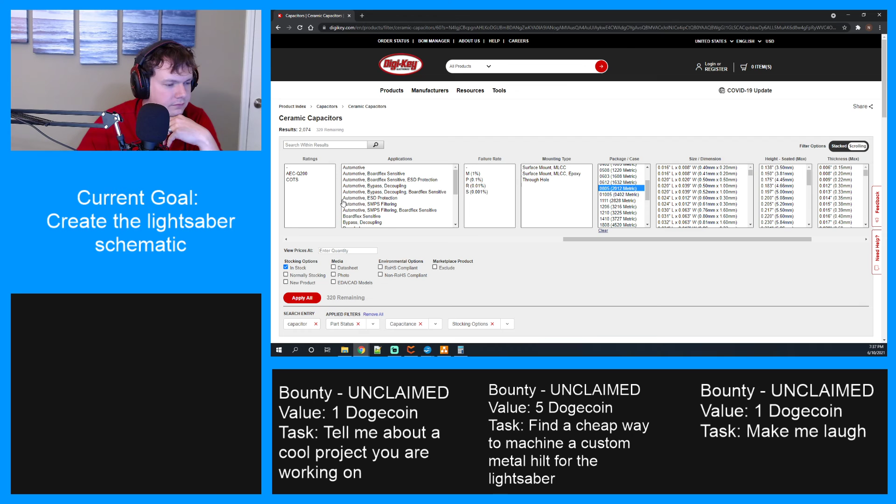Voltage rated needs to be higher than 4, probably anything up above that's fine though. Tolerance probably doesn't have to be that tolerant either. We do want an easy to work with component though, so 0805 as usual. Might as well go for the same temperature coefficient as the other one, that really doesn't matter that much in the sum of stuff. So, all right.

Good luck, let's pick one that is already in Circuit Maker. Let's see if we can find a cheap one, actually. Wait, did I click the wrong capacitance? I meant to click 1 microfarad, I think I clicked 0.1. That would make this a little tricky. 1 microfarad. Plenty of options.

All right, well let's start with... let's just start going down the list. Nope, what about AVX? Could they possibly have... they do have a model. Nice, okay, that's getting placed.

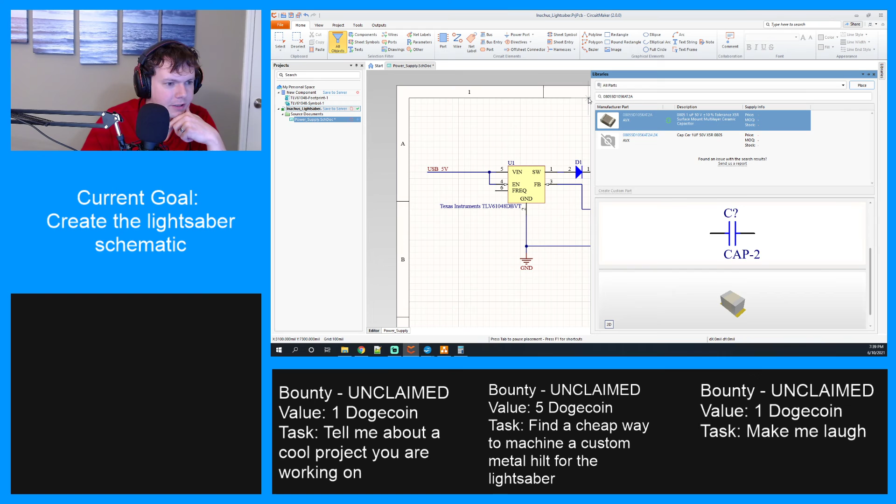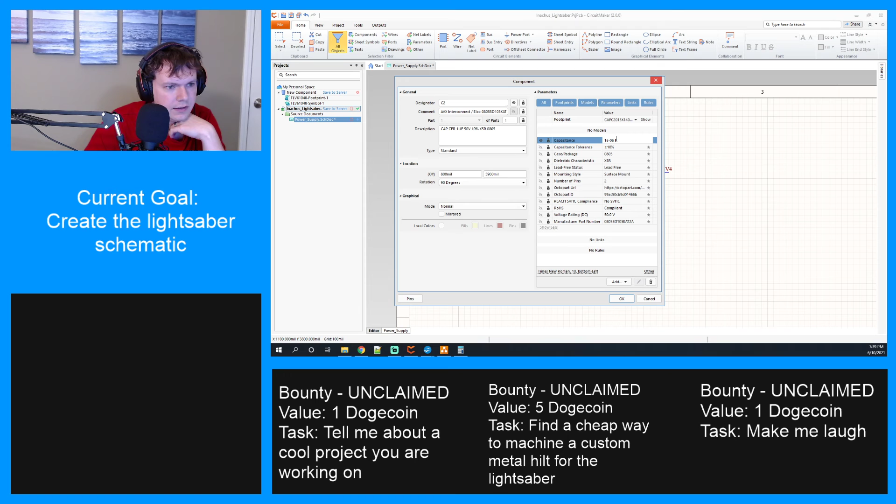Okay, let's rotate this 90. And then let's show the capacitance, hide that, relabel this. 1 microfarad. Okay. And then I'll put this right like here.

Wow, I'm just running out of room to put this big line of text. Let me just change this, I want to take out the Texas Instruments part, just have the part number. Okay, and then just drop that right there. Perfect.

All right, wires. Oops, all, create a wire. Go, and that's going to go here. Excellent.

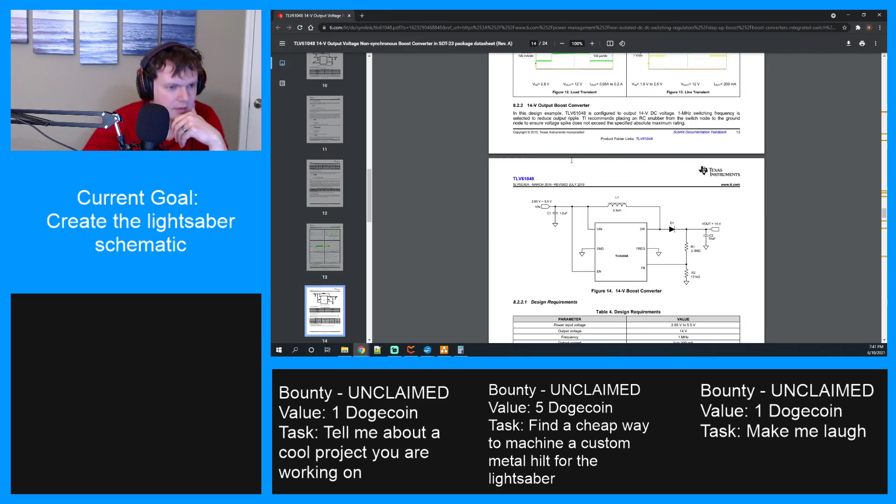Effectively like a switching regulator. I mean, which, yeah, it has to be something like that to do a boost, but... okay, didn't realize that was quite how that was going to work. So how do we decide the inductor value?

Inductor selection. V out. Okay. Inductor values between 2.2 microhenries and 10 microhenries. The peak current, to calculate the current in the worst case, use the minimum input voltage and maximum output voltage and the maximum load current of the application. Right.

So in is going to be like 5 volts, out is going to be 8.4 volts, and then the current is going to be 2 amps. Oof, I could see this being bad. All right. So the top number, V out times I out, so 8.4 times 2 equals 16.8. And the bottom number, V in, which is 5 times 0.84.

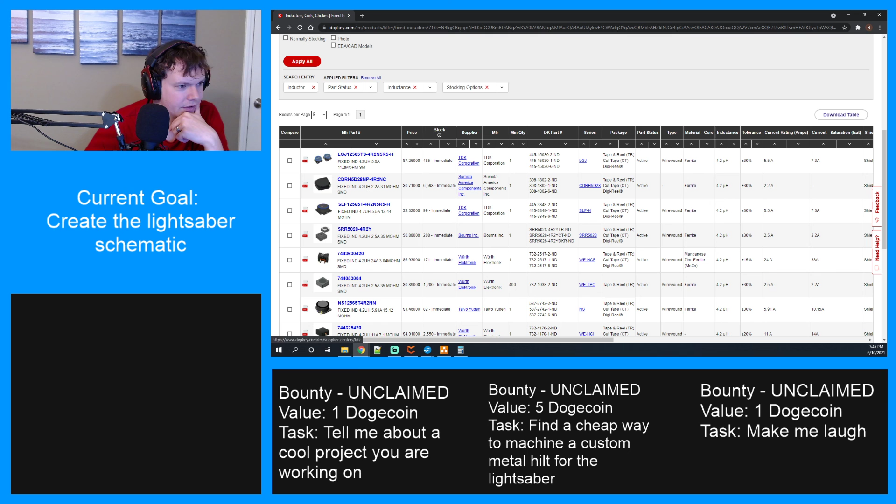Well, any of them would be fine. Just gotta figure out how to solder them. Something like this would probably be the easiest to solder. That's probably expensive though. Yep. Anything that looks weird is usually really expensive. Engineering pro tip. Also, I'd have no idea if any of these would be even in Circuit Maker, so.

Well, let's try one. Let's just start looking through. Yep, that's not. I'm just looking through the easy ones first, the ones that are cheap and wouldn't be too hard to solder. The fact that all these random parts are showing up must mean that they're pulling from a database somewhere that somebody has already put together.

All right, let's organize these by price and just start going through the list. Tried that one, that one's going to be too hard to solder. That's going to be too hard to solder. Let's try this one.

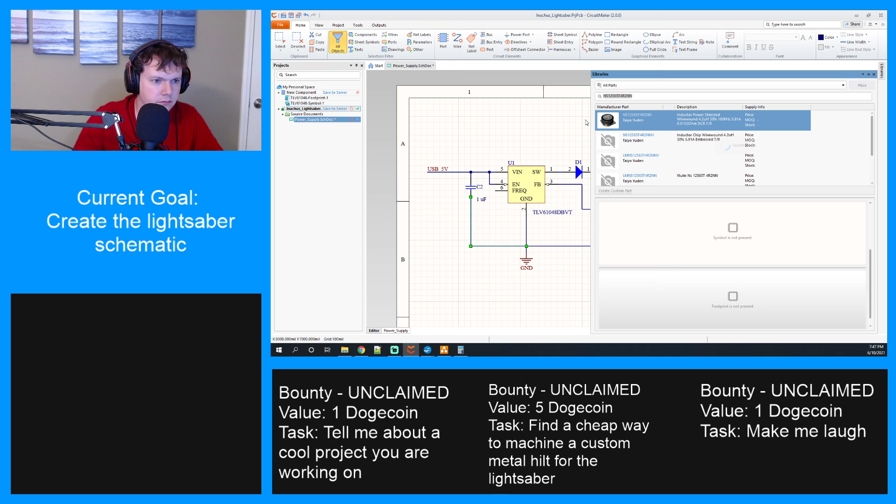No model. Just gonna gradually get more expensive, I guess, until we find one with a model. I don't think any of these will, though. These are kind of really uncommon parts. This one does. Jeez, okay. It's $4, though, at least here on DigiKey. It's kind of a lot.

Look at the datasheets here to see if they have a high current inductor. Didn't know if they had a typical application like for power devices or. Gotta be careful using big stuff like this too, it'll be hard to make things fit.

All right, let's look at this datasheet again. Just want to make sure that there's nothing else I'm missing for choosing this. Here we go. Use equation 2 to equation 4 to calculate the peak current of the application inductor. To calculate the current in the worst case, use the minimum input voltage. So that's the worst case.

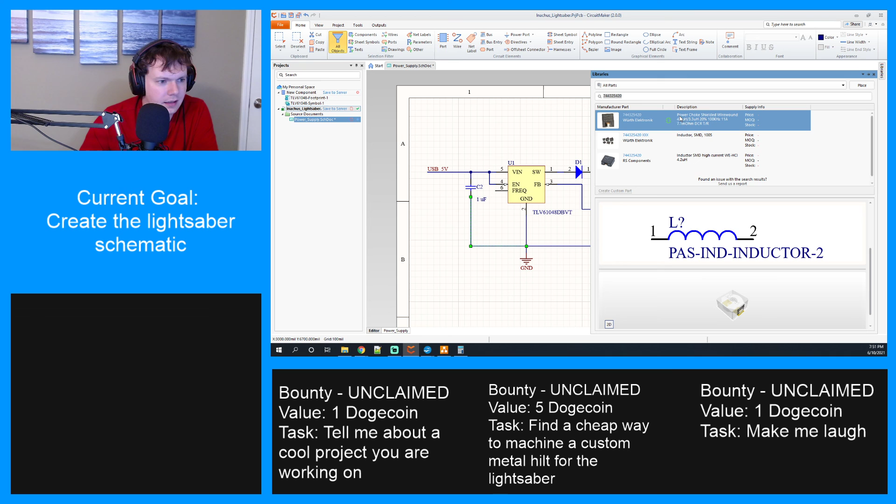All right, this is going to become a whole thing, and I'm getting close to the end here, so I may not do this one just yet, but we need to make sure we add it. In the meantime, and maybe that means this, maybe this means too that we can pick some. Let me look at this actually real quick since we have a half a second. See if there's anything in that range that would give us not this crazy package type.

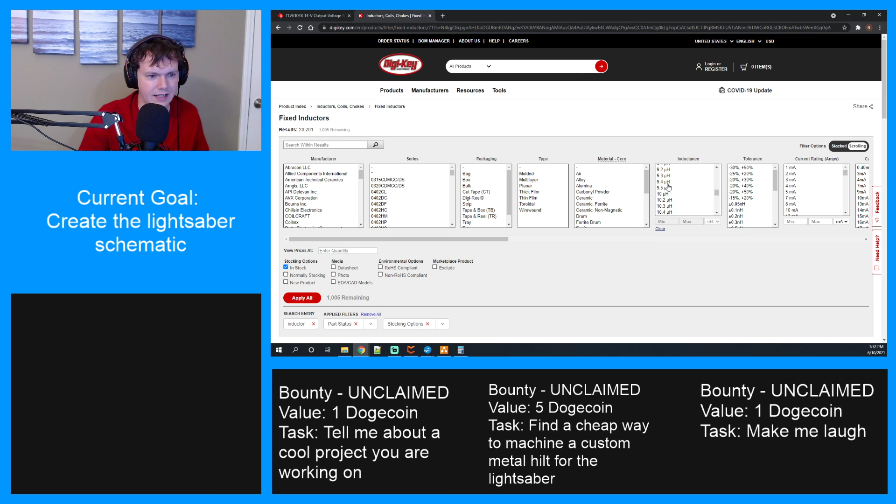Inductance, and what did they say was the intended? Hold on. .2 to 10 microhenries. Okay, so if I start with that, just give me every value in that range. And we'll see if there's anything that's not horrendous, like anything that's more of a standard package. Yeah, something like this, okay, 2.7 microhenries. All right, yeah, we can make this work.

These would be a lot easier to mount, and they're really cheap too. Jeez, oh, but these are all maybe something with cut tape. Okay, yeah, 10 cents starting. Okay, so we'll have to go through and do the math next time to figure that out.

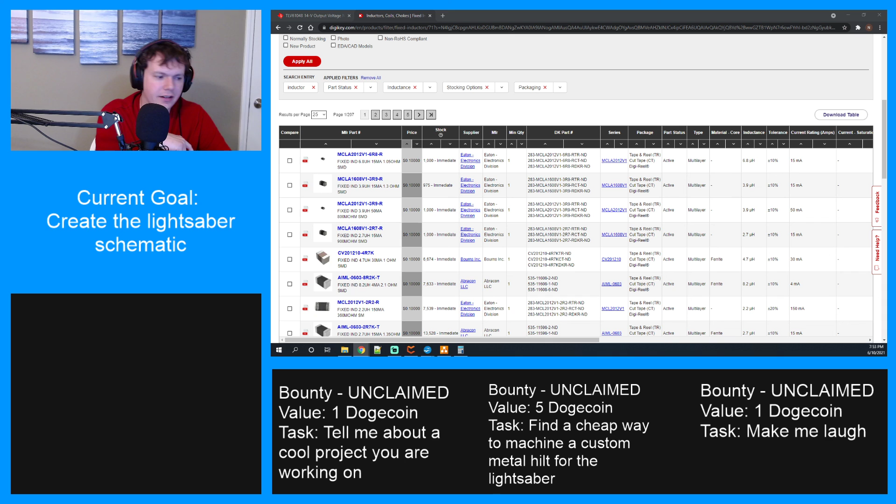All right, I'm going to call it here for tonight because I'm getting tired. And obviously, it really feels like we did not get very much done at all because we hardly made a dent into the first - we're almost done with the first block of our big diagram here. We've just literally done this one thing. So yeah, we got a long way to go. All these circuits together are going to get very complicated, and there's going to be so much to consider. All right, well, not the end of the world. We're making progress. We'll keep making progress, and we'll just keep going and going and going.